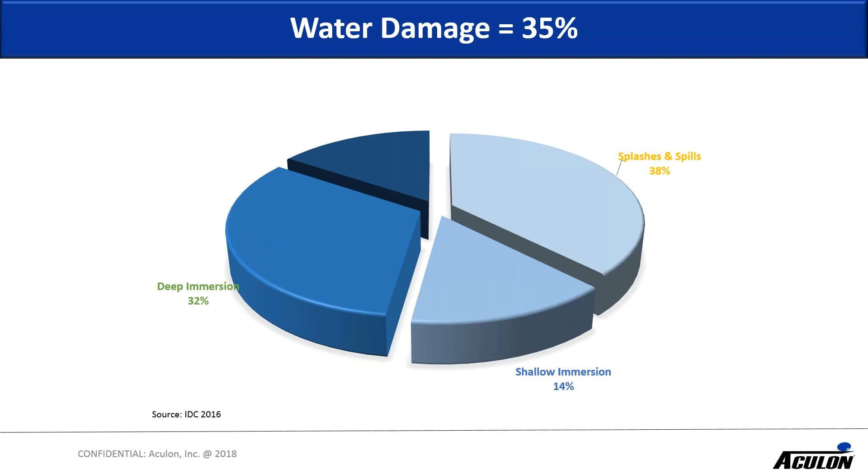As you can imagine, if you look at the breakdown of damage to mobile devices, a good chunk of it, nearly 50%, comes from shattered screens, and I'm sure we've all seen or witnessed that. But the second biggest area really comes from damage caused by water, and it can be in various forms. It can be dropping it into a pool or a toilet, or it can be just splashing water onto it and getting into the ports and damaging it. So about 35% of the overall damage is basically caused by water damage. It's a big deal, and it's obviously a concern for those device manufacturers, but it's also a concern for other ones.

We put together a little fun video that we'll play for you, showing an example of waterproofing.

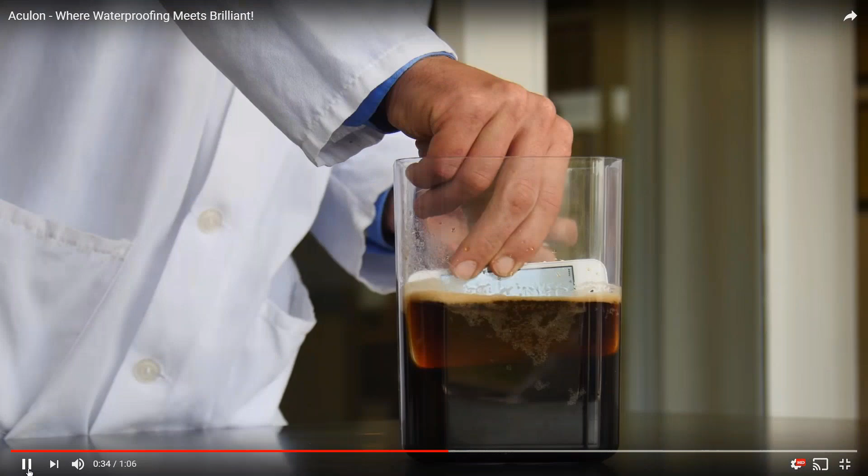I need you to waterproof my phone. Okay. Brilliant! Brilliant!

So as you can see, a kind of fun video based on an original Guinness ad that we put together for a St. Paddy's Day type promotional video. Obviously consumers are damaging their devices in daily life, whether it's dropping in pools or toilets, or we do quite a lot of work now on outdoor lighting, telecommunications, switching equipment, where you've got the outdoor environment, rain or humidity playing a role there. And then there's obviously a number of applications in industrial settings or medical device settings where they're exposed to kind of wet working conditions, and people are looking for some protection on these devices.

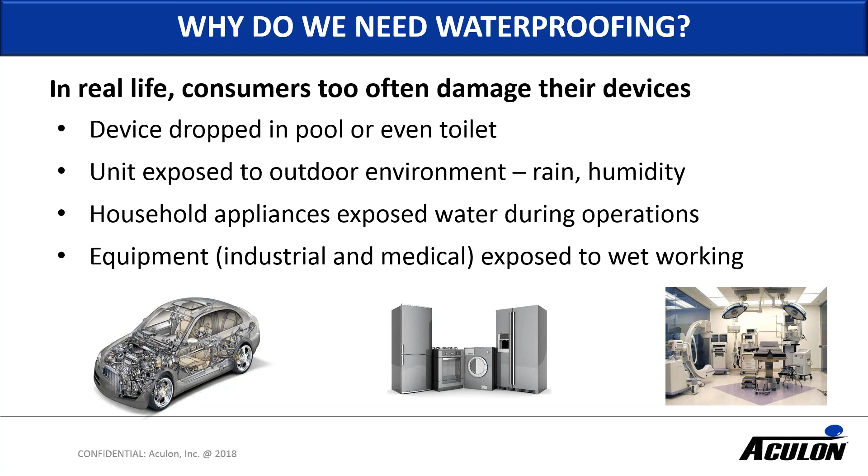So when we start to work with customers, we often get people calling us up and asking, can you waterproof our device? And the answer is sure—what kind of waterproofing requirement do you need? And we like to use this scale. It's the IPX scale, and it gives you different levels of waterproof protection.

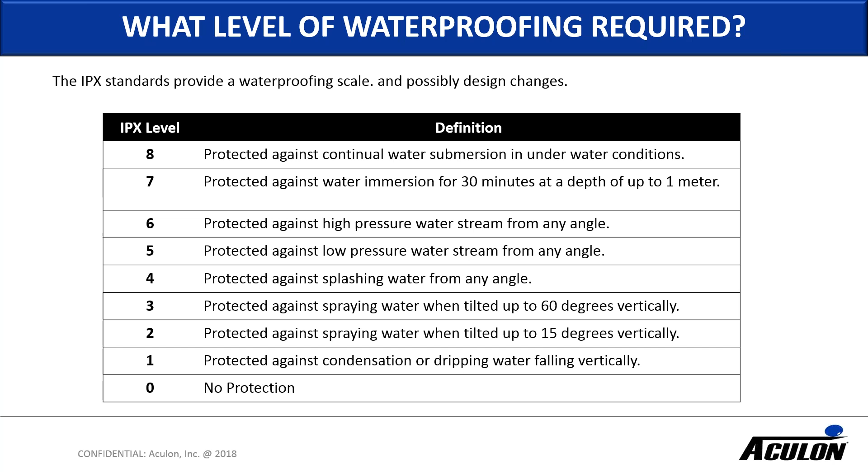This really helps us understand what that device is likely to see and what the customer is looking to protect against. So obviously in some cases, you are worried about splashing water or potentially humidity or condensation. In other cases, such as mobile smartphones, they are looking for full water protection for 30 minutes and beyond. So this helps us understand the level of waterproofing someone's going to need, and that helps us pick which of our treatments is probably the most appropriate and the easiest from a process standpoint to do.

If you work with us, we'll help you understand early on what type of waterproofing you need. It's not just when a marketing person says 'I need waterproofing' - we really start to define that so we can make sure we're testing what is appropriate. So we've created a series of products to address a variety of situations, from humidity to full water immersion. Mario is going to take you through the options and some case studies. Mario, please take it away.

Thank you, Edward, for that excellent introduction. As Edward mentioned, we're going to talk about the specifics of the NanoProof product line. The NanoProof line offers protection all the way from just basic humidity up to full water immersion for significant lengths of time.

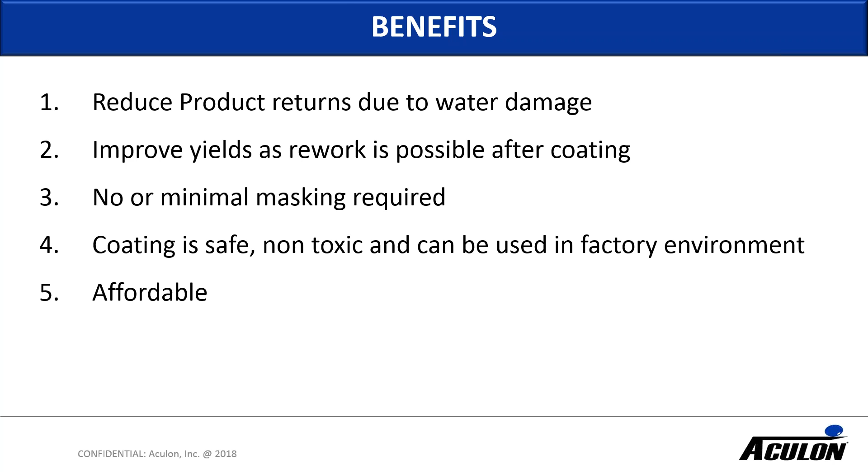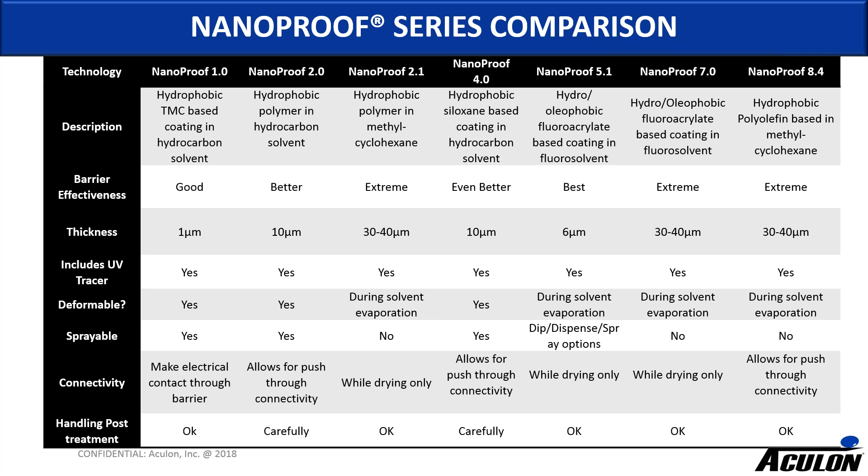So here we have an overview of the NanoProof product line, which gets into details on some of the specifics of each. I'm not going to go through every single line - this will be available in the recording and slides, which we'll email to you after the webinar. But basically it covers from NanoProof 1, our base level, extremely easy to apply material, typically around a micron thick, providing humidity and incidental protection, all the way up to the 7 and 8.4 series, which are thicker, in the 30 to 40 micron recommended thickness range, and can provide up to IPX8 levels of protection and are already implemented in several applications.

As you can see here, for your automated inspection needs, every single NanoProof variant comes with a UV inspection dye. If for some reason you need a clear coating or don't want a UV dye in the coating, we can also provide you with a UV-free variant. But as standard, they do come with a UV fluorescing dye.

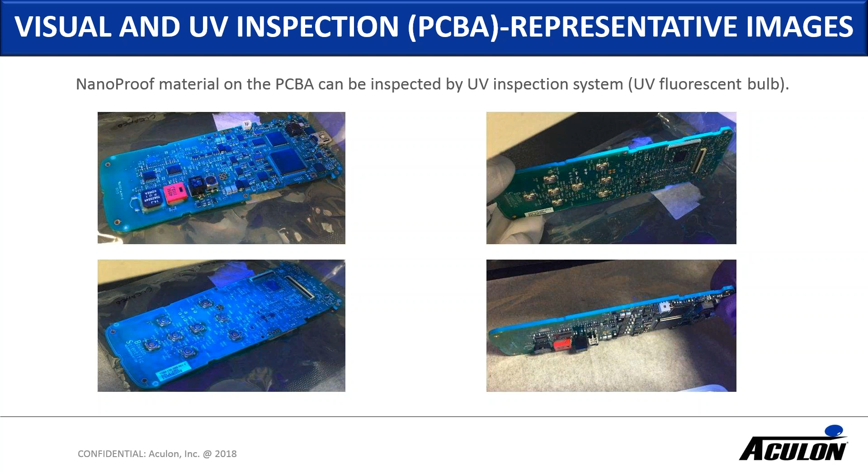So now we'll get into how we actually test to confirm the efficacy of these different materials. From the get-go, we've utilized IPC test boards - essentially little multi-purpose test patterns. They can be coated with the different NanoProof solutions, then put under voltage and inserted into water or exposed to a variety of conditions. You can measure current leakage and the levels of corrosion on the board to evaluate how the coating performs.

Typically we'll coat the boards and then run them at 60 minutes in water, powered at either 3, 6, 12, or 18 volts, and then measure the current loss and also evaluate qualitatively the appearance of the board to see if there was any corrosion.

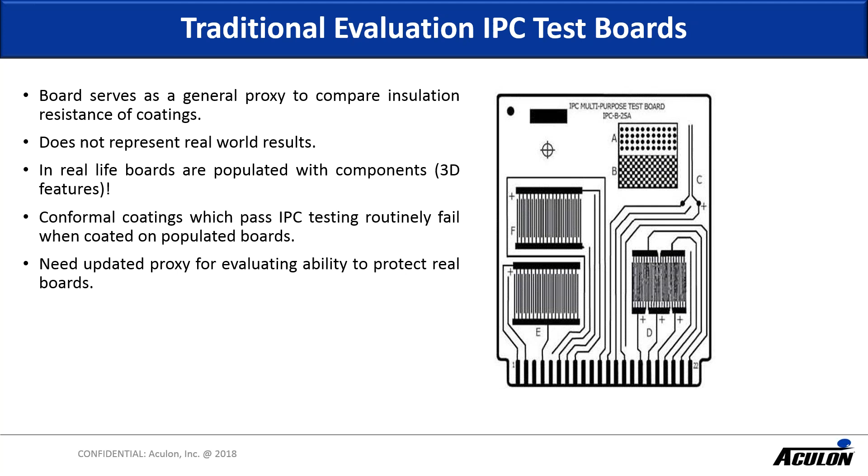So we needed a proxy to predict how different coatings would be able to protect a board in the real world. We came up with an additional test, in addition to the IPC test board, which was coating these LED strips. They're very basic and simple. They can be powered up, and you can observe their function because the light is shining while it's in the water, so you know whether it's working or not.

Essentially what we do is dip these LED strips and then run them similar to the IPC test board, running them under voltage in water for 30 minutes to an hour, and then evaluate the components for failures. We look for evidence of corrosion, and this is a very good proxy for determining if the coating being evaluated is capable of offering real-world protection by essentially coating the edges of the components.

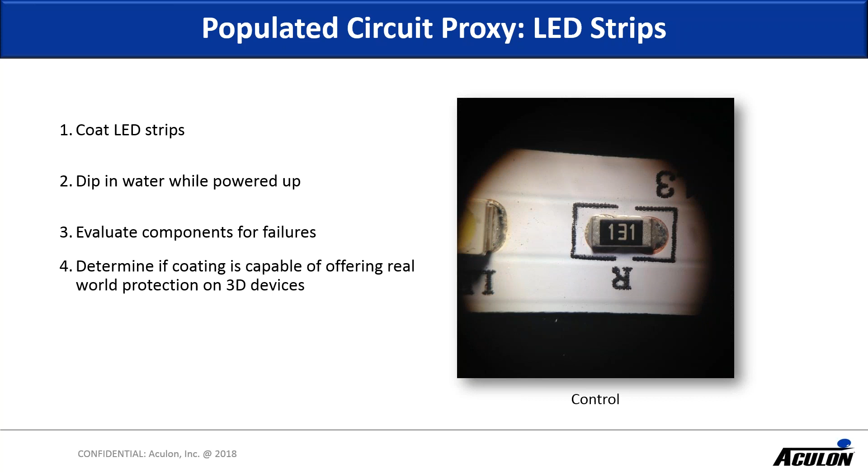Now, to get into some of the testing we ran - a common conformal silicone, which passes the traditional IPC testing with flying colors, fails on the LED strip testing in almost all cases. Even putting down multiple coats, in some areas as thick as 100 microns, the LED strip still failed.

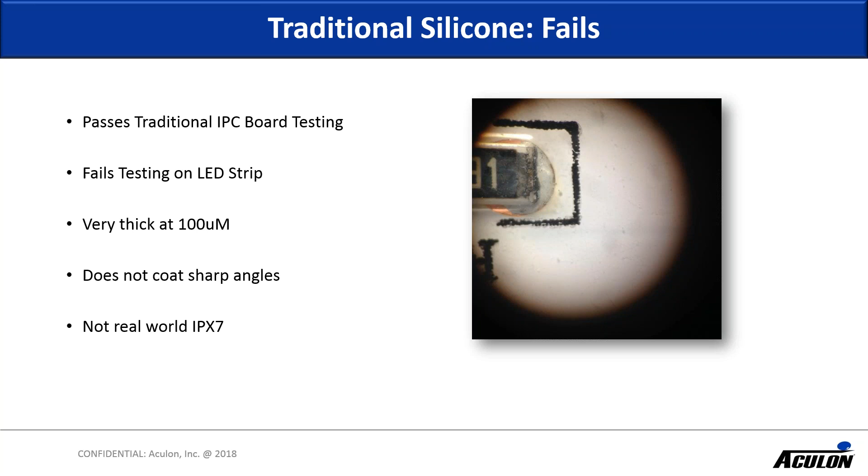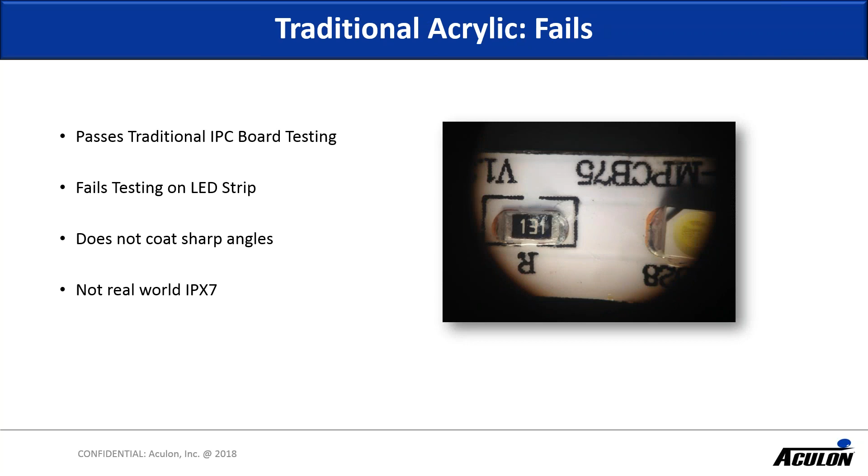Same with the acrylic conformal coating - it passes the IPC board testing with flying colors, but then fails on the LED strip. It does not coat the sharp angles and does not lead to real IPX7 levels of performance.

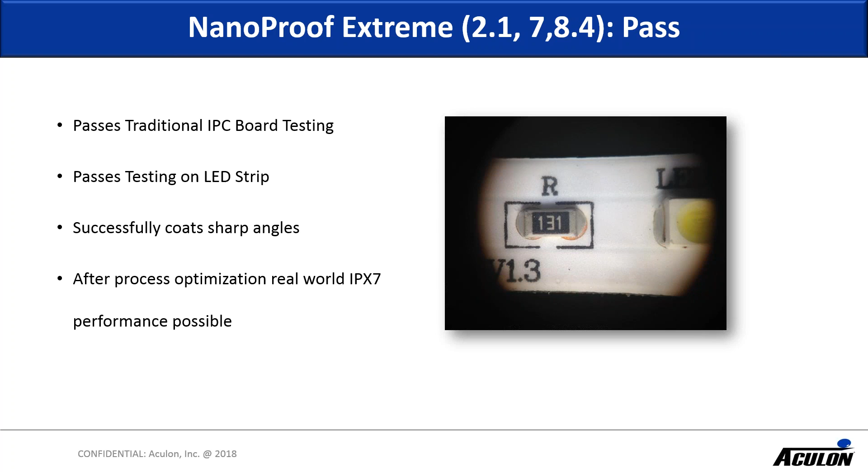So with the materials that we've developed for IPX7 here at Aculon, they not only pass the IPC board testing, but they also pass the LED strip testing, because we formulated them specifically for water protection, and they coat the sharp angles of the components. So after process optimization on your part, real-world IPX7 levels of performance are expected.

Now to cover some independent testing that was done by a company called NPL out of Europe. This is a two-phase test, summarizing their study in phase one, which compares the performance of traditional conformal coatings to the new age coatings that NanoProof has developed, which provide edge coverage. They compared directly conformal coatings, the Aculon coatings, and also combining the two coatings together.

What they found in this stage, since the focus was on those IPC test boards previously discussed, is they confirmed that NanoProof provides protection, they confirmed that the conformal coatings provide protection, and they confirmed that using both also provides protection. So it's as expected, and we have independent testing showing that the NanoProof material does provide the level of IPC protection we've disclosed in our internal testing.

What's most important is their next round of testing, where they're going to start testing on three-dimensional devices, where we would expect to see failures with the traditional conformal coatings, but passing parts with the Aculon coatings. We're excited to get the results of that testing and to share it with you once it's available.

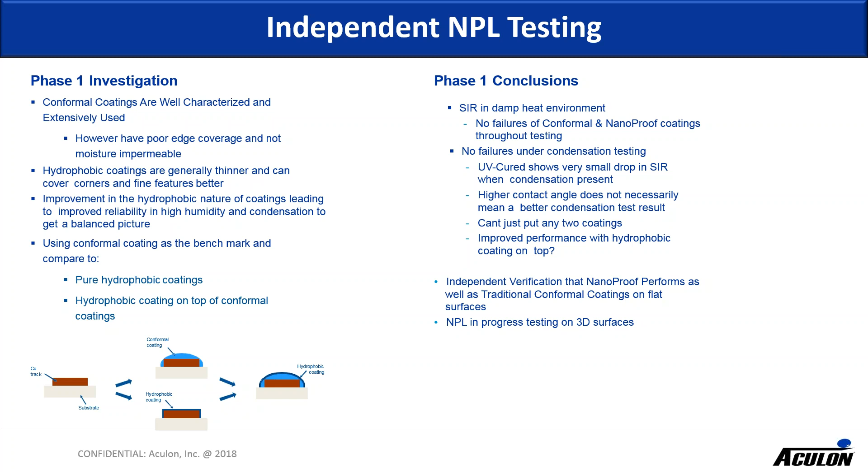So the next thing you're wondering about, I'm sure, is how do you apply NanoProof? Being a liquid, it can be applied in a wide variety of methods, with extremely flexible application options. It can be sprayed, dispensed, jetted, dipped, or applied using any other method of applying a liquid to a surface. Depending on which NanoProof you're utilizing and the specifics of your application, some of these methods may be more desirable.

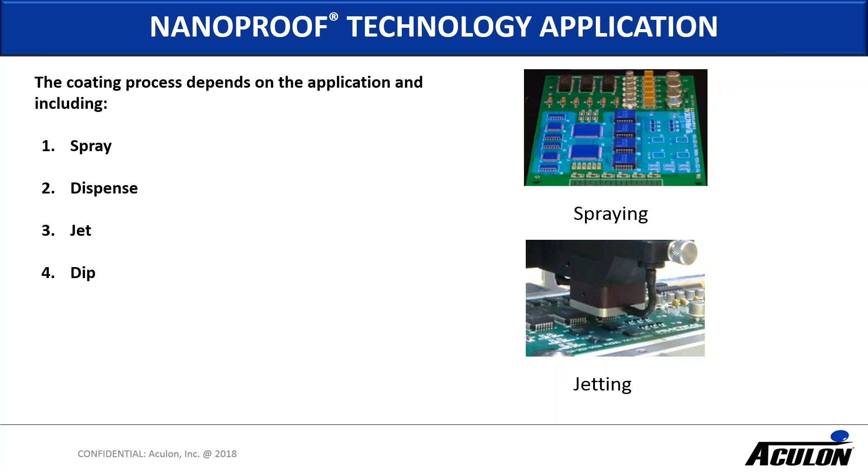The coating equipment for these products is readily available from companies like Nordson, Asymtek, and PVA.

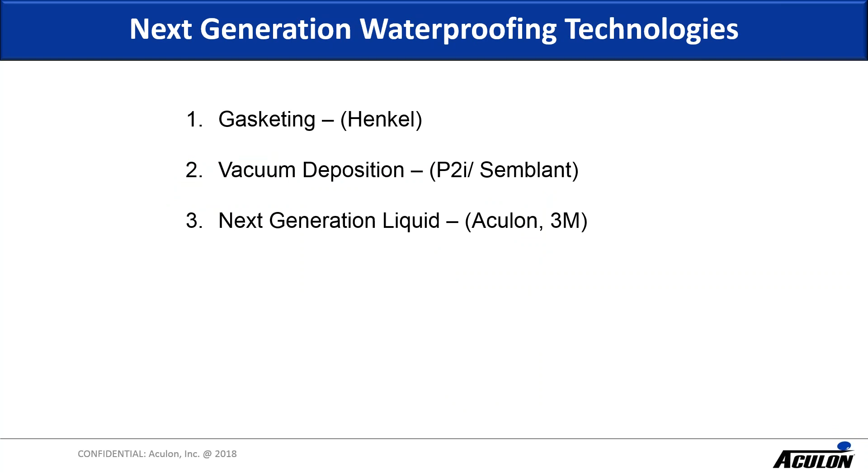And now we'll get into a comparison of some of the different waterproofing technologies on the market, from gasketing to vacuum deposition to next generation liquids.

Gasketing has some very good pros. It has excellent initial performance, with IPX5 up to IPX8 levels expected. The only downsides to gasketing are that it's complicated, it uses up valuable real estate, and it requires either elimination of ports or some sort of plug to still utilize a port without water coming in. And as we all know, those plugs often end up lost or broken, and they're prone to catastrophic failure. If that gasket fails and the part gets immersed in water, the water is going to get inside the phone or device and it will certainly fail.

Vacuum deposition is the other option available. It offers lower levels of performance, typically IPX2 to 5, and it's hugely complicated. It requires masking and demasking, and very expensive capital equipment — the vacuum chambers where the material is applied are not cheap at all. And it can be a slow process because it's a batch process, which can be a bottleneck in your production line.

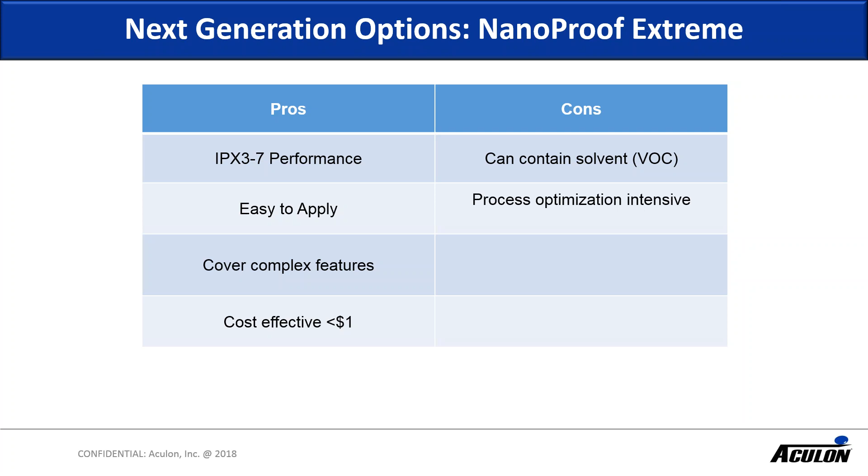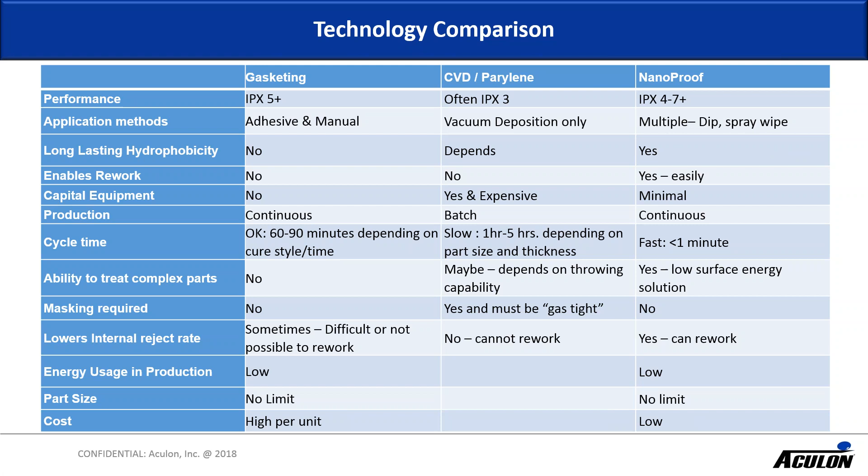So now we'll cover some case studies.

First up is a Bluetooth headset application that we helped a customer implement. They were looking for protection from sweat and splashing water, but didn't need full immersion proofing. We treated parts for this customer in addition to some evaluations at the customer site. This was around a 6-month program, and we ended up selecting NanoProof 4, which was sprayed on all the parts excluding the audio components, and this ended up yielding an IPX4 level of performance.

Next up is a wearable device application looking for protection from sweat and splashing water. They did not need full immersion, mainly focusing on rain, sweat, and shower exposure, so IPX4 was the required performance and IPX5 was desired. To get this specified in, we initially tested some parts via spray. The customer identified some high voltage components which needed additional protection via spot treatment, so we ended up selecting a spray of 4.0 and then a spot treatment of 8.4, a more robust option on some of the more sensitive components. This ended up passing the customer's IPX5 requirement.

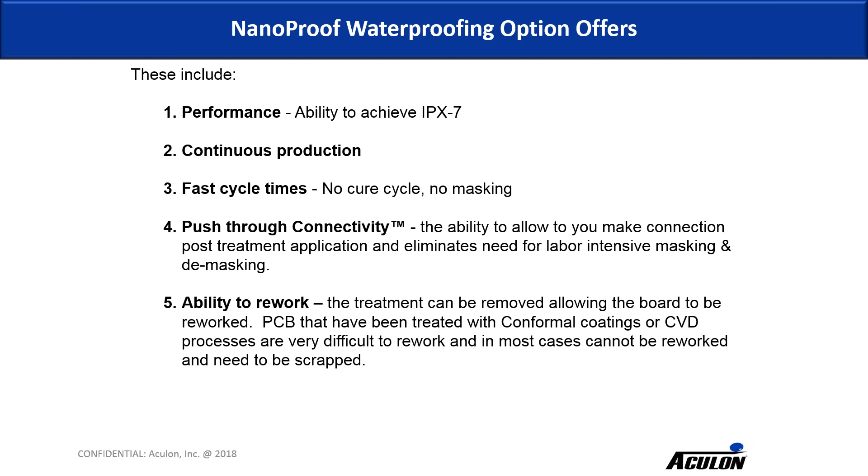Aculon will work with you to determine the best application process. We have a variety of methods and a flexible approach. Starting with a simple customer trial, we can provide you with samples of the NanoProof materials that are best suited for your application. You can coat your parts and do some initial testing, and then we can carry on from there. Aculon can also do the trial for you. If you are able to send us some of your parts, we will treat your parts for you and then return them for your initial testing. And then based on your feedback, we'll iterate from there.

And then even better, if our technical teams can set up a meeting to set up a DOE, we can potentially treat several parts with several different options using several application methods. From there, we can compare the performance of each of these different options and move on from there.

So in summary, Aculon is a leading supplier of nanoscale repellency technology. We've qualified NanoProof in production on numerous applications. It's extremely easy to apply and cost effective. The NanoProof series provides options based on your performance requirements and has proven to outperform competitive technologies. In addition, Aculon supplies the NanoProof series globally. So with that, thank you for attending.